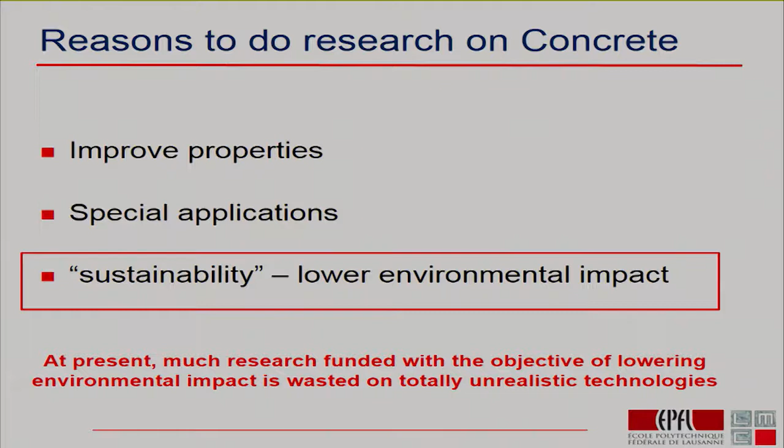Unfortunately, when we come to talk about sustainability, I think the general public and the funding agencies are not really all that well informed. We unfortunately see quite a lot of research funding with the objective of lowering environmental impact often wasted on totally unrealistic technologies, because concrete is the most used material in the world.

But before I talk more about that, I want to introduce this slide. Global warming and CO2 is a worldwide problem. CO2 doesn't stay where you produce it. Today we have to be realistic that this is overall CO2 - this is the amount we produced in OECD countries, this is the amount we produced in non-OECD countries. So even if we completely stop all our emissions in North America, Europe, this would go nowhere near solving the problem. We've really got to work on solutions that can be picked up in what we generally call developing countries.

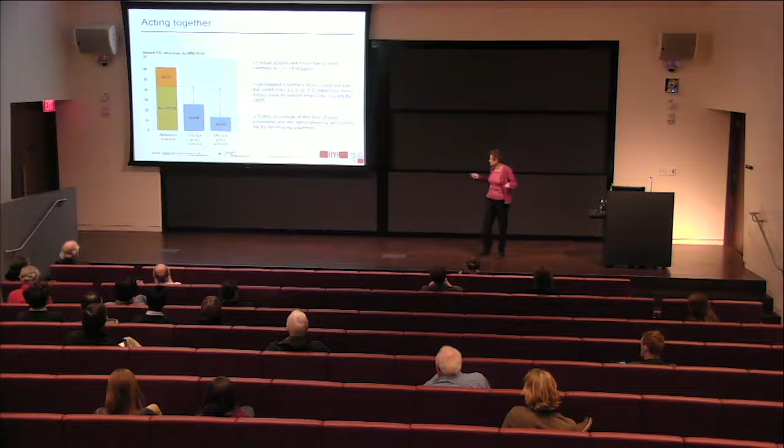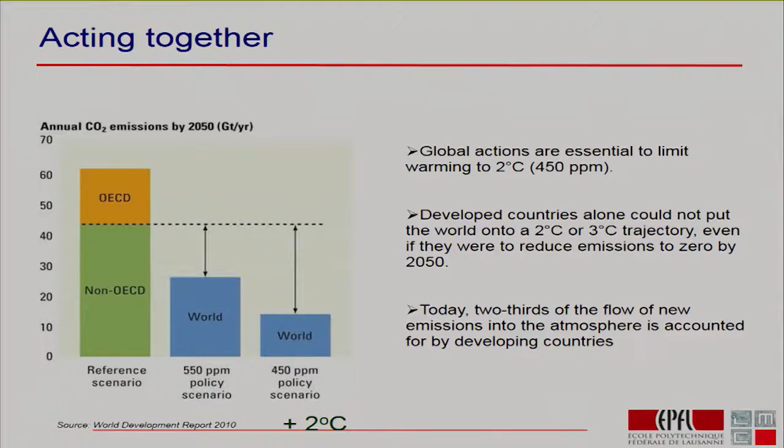These are overall CO2 emissions, but if we were to look at the breakdown when it comes to concrete, we would have even more of the emissions coming from non-OECD countries. So I think we've got to think about technologies not just that can be applied in developed countries like North America and Europe, but in the developing world.

Now the second thing I want to say is, people have very negative views about concrete. And this is really, I think, very much unfair, because we just don't appreciate that concrete is everywhere. Concrete makes up about half of everything human beings produce. We simply couldn't do without it. And here's the comparison for three very common materials: concrete, steel, and timber.

Concrete makes up about half of what we produce every year, and in doing so, it accounts for about 8% of CO2 emissions. Now, that's actually not a bad ratio. When you look at steel, there's about 20 times less steel produced than concrete, and it produces almost the same amount of CO2. So the amount of CO2 coming from concrete in terms of performance is extremely good. It's just because we use such a colossal amount of it that overall it produces a lot of CO2.

And we come to something like timber. Many people argue about these figures, and I don't really want to argue about the numbers in terms of CO2. I just want to point out that today we're using about 1/10 of the amount of timber compared to concrete, and we already think this is way beyond the limits of sustainability. That's to say, we're cutting down much more forest than we're replanting. So there's no way a material like timber can replace concrete. It's just physically not possible.

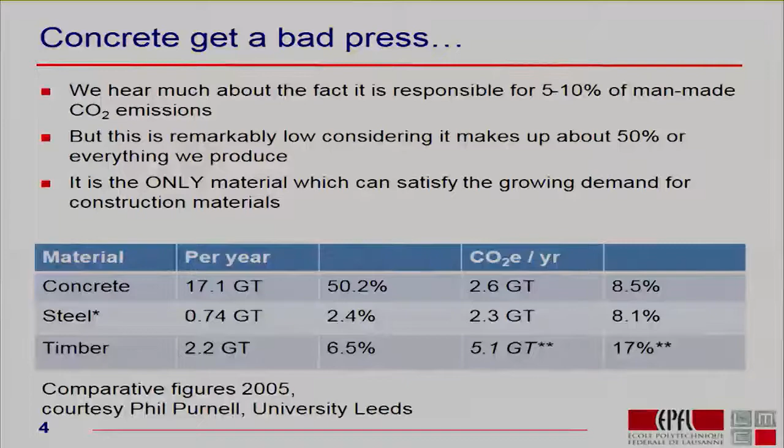When I make this presentation in North America and Europe, particularly countries like Sweden, they say, oh, this can't be true, we have very sustainable timber production. Yes, you do have very sustainable timber production in Sweden, but Sweden is a very small country of about 10 million people. If you go to very big parts of the world like China and India, you cannot build in timber—they do not have timber. The only choice you really have is concrete. At lunch today, one of the students asked me, do you think there's a future for concrete? I think if you look at these figures, you realize there's no alternative.

We're going to be using concrete for the foreseeable future. And if we're going to be using it, what we really need to think about is how we can make it better. This figure of 5 to 10% needs to be put in perspective.

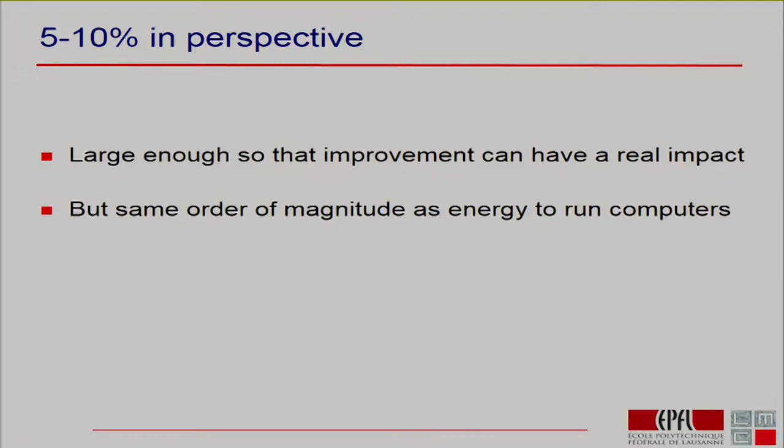I made this presentation to architects in Zurich, and one guy stood up and said, I think construction is causing so much CO2, we'll have to stop building in the future. I looked at this guy and said, are you serious? Are you telling me when you grow up, you're going to sleep on the street because we're not going to build any more houses for people?

Nobody thinks it's bad that this is the same order of magnitude as the energy we spend running computers. Every time you press Google search, you are sending CO2 into the atmosphere because the servers doing that searching need a lot of cooling. So let's get it in perspective. People have to live somewhere. We could say it would be better if the world population was perhaps lower—that's another debate, I don't have the capacity to do much about it—but if there are the people there, then they need houses, and concrete's probably the best way of doing it.

So let's look at where this CO2 is coming from, because we need to know where it's coming from if we're going to reduce it. Cement accounts for 95% or so of the CO2 emissions in concrete. 60% of the CO2 is coming from the production, and this is really quite unique in terms of industrial processes, because most industrial processes, nearly all the CO2 comes from the energy in that process.

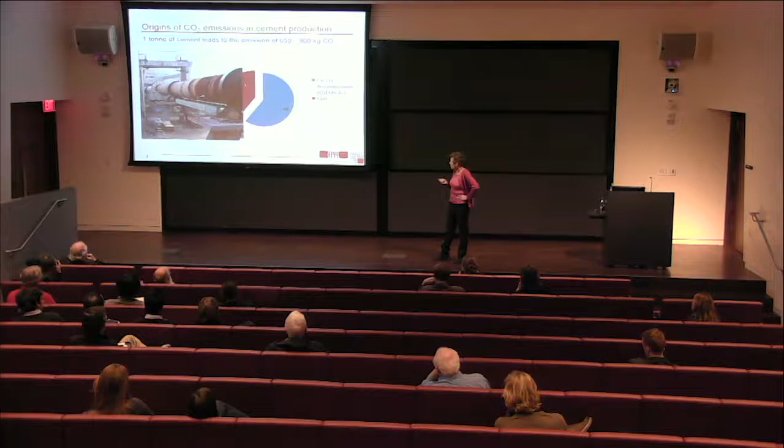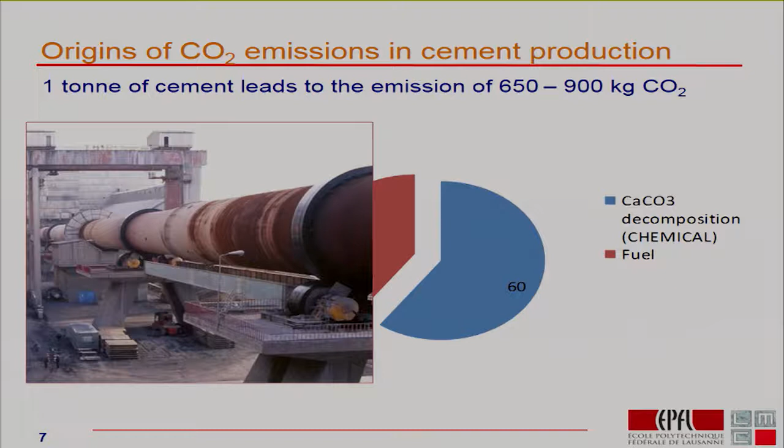So if we have alternative energy sources, like solar or wind, then this will largely solve the problem. In making cement, only about 40%—this is a cement kiln, you have a huge flame which heats the cement raw materials up to about 1450 degrees Celsius. It seems like a very energy-intensive process, but it's actually very efficient. The efficiency of a modern state-of-the-art cement kiln is around 80% of thermodynamic limits, and those of you who study thermodynamics know you really can't do that much better than that. More than that, it's a very flexible process, because nowadays you can have most of that fuel coming from waste. For example, when you're making the seats in this auditorium, you'll have lots of polymer offcuts. You can chop that up, feed it into a cement kiln, and use it as an energy source for cement.

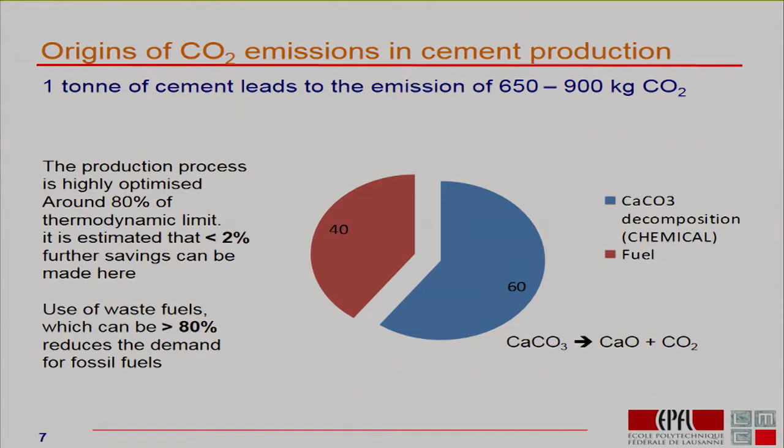So it's a very flexible tool, and it's unlikely we're going to be able to make a lot of savings here. So we really have to look at this other 60%, which comes from what we often call chemical CO2. The first stage in the production of cement is we take limestone, which is calcium carbonate, and the calcium carbonate decomposes to give us calcium oxide and CO2, and that accounts for 60% of the emissions. Now, if we're going to change that, the inevitable consequence is we're going to change the chemistry. And if we change the chemistry, then the whole way it reacts and performs is going to change, and that's why we need research to find out what differences these things make.

Now, the demand - we're not facing a static situation. We're facing a situation where the demand is going up, and it's going up fast. These are the projections out to 2050.

But if we look at what's already happened in China in the last 10 years or so: China has invested in its infrastructure. It's built housing, it's built high-speed rail links. This all has used concrete. Today, China is producing more cement than was produced in the whole world 10 years ago. I think Bill Gates came up with the figure that in the last 3 years, China has made more concrete than they did in the USA in the whole of the 20th century.

So it's colossal. And things are slowing down in China now, we read about that every day. But what's going to happen in India? Today in India, the consumption of concrete per capita is 6 times less than China. Even if India doesn't reach the level of China, even if it only goes to say half that amount, that's still an awful lot more cement that's going to be needed.

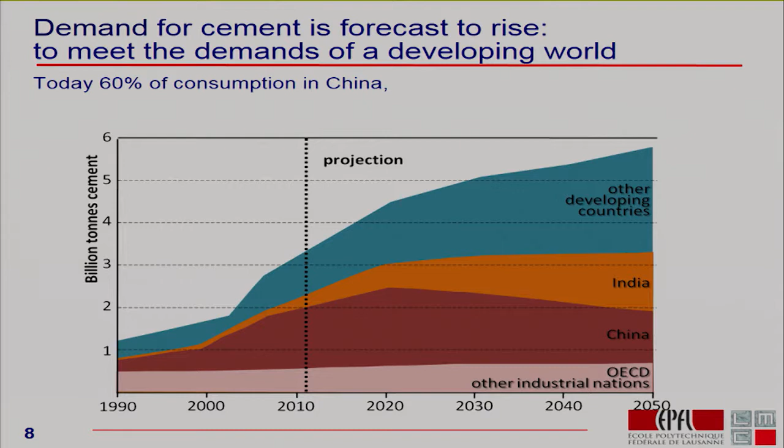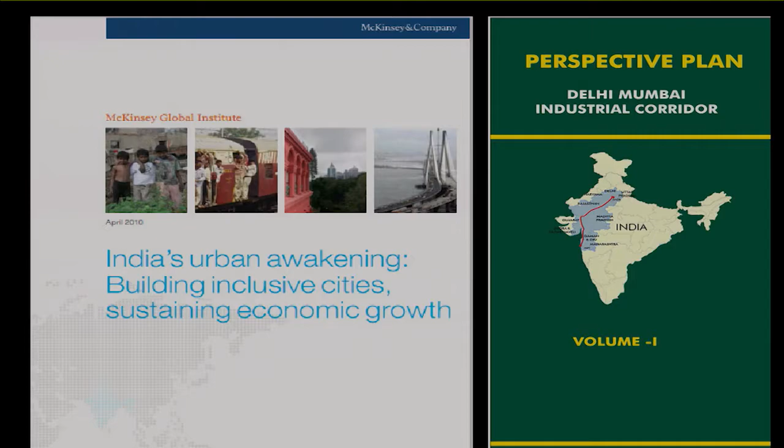And there's a lot of other countries in South America, Africa, the rest of Asia, that are really looking at the same development path. This is just an example from India - this is what they're aiming at now. This Delhi-Mumbai corridor, I think they've got plans to build about 80 new cities in this corridor.

So before we go on to look at what can be the solutions, I think we also need to look at why this product, Portland cement, is just so good. And it is so good - I hope I can convince you of that by the end of the lecture. It was invented nearly 200 years ago, so we think it's kind of old hat, but by a coincidence of geology and other things, it really does work amazingly well.

Now, this is the analysis of elements in the Earth's crust, so that's a pie chart. And it's something that comes from the cosmology of stars. But basically, you have these 8 elements: oxygen, silicon, aluminium, iron, calcium, sodium, potassium, magnesium. This makes up 98% of the Earth's crust.

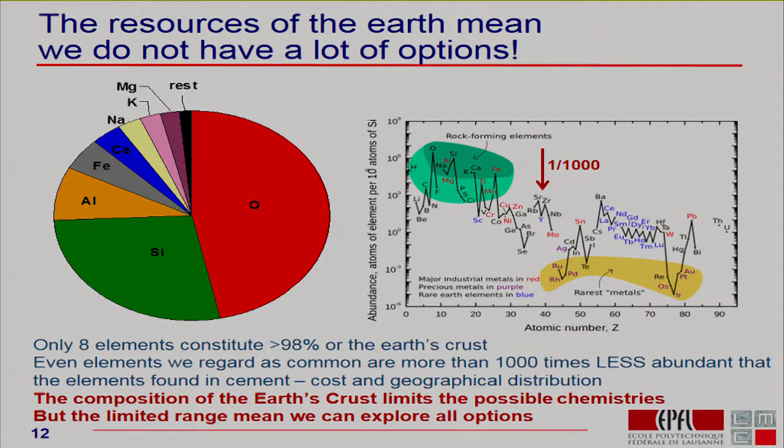And you can see in this other graph here the abundance, and you can very roughly say that abundance is equivalent to cost. So as we go down here to these rare metals, we see the things that really cost a lot, and here we see the things that are really cheap. So even something like barium probably costs 1,000 times more than something like calcium. You can make cements out of barium salts, but this is really not going anywhere in terms of solving our construction problems.

But the other interesting thing is that we can really do an exhaustive analysis of all possibilities. So people often come up to me and say, what's new? Like there's going to be some new miracle solution we can come up with. And what I try to tell them is, look, there isn't. We know we have looked at all materials we can imagine to make cement, because we understand the basic idea of how cement works.

You take this gray material, these gray grains, and you mix it up with water. At the beginning, it looks like this - you have these gray grains floating around in water. And you can move it, you can shape it, you can form it, you can put it in a mold. And then you have this reaction between this gray material and the water to form this new red stuff, which we call hydrates.

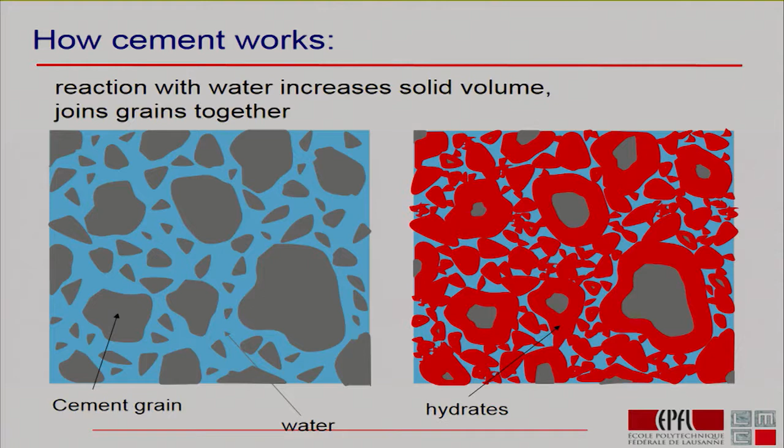And the magic thing about these hydrates is that they have combined the water into solid form, so that now this solid, which is red, occupies more volume than the grey stuff. And because it occupies more volume, it starts to fill in all these spaces between the grains and link them together. And that's how you get the strength. That's basically how concrete works.

So if you're going to have something that works as a cement to make concrete, it needs to react with water. The ions need to move through the water, and they need to deposit in the space. So let's look at these different oxides in the Earth's crust.

If we take the two alkali oxides, sodium oxide and potassium oxide, these are both very soluble. You can have very high solubilities of sodium, potassium in water. So these may be present, and they're not necessarily doing any harm, but alone they're not going to give you this hydrating system.

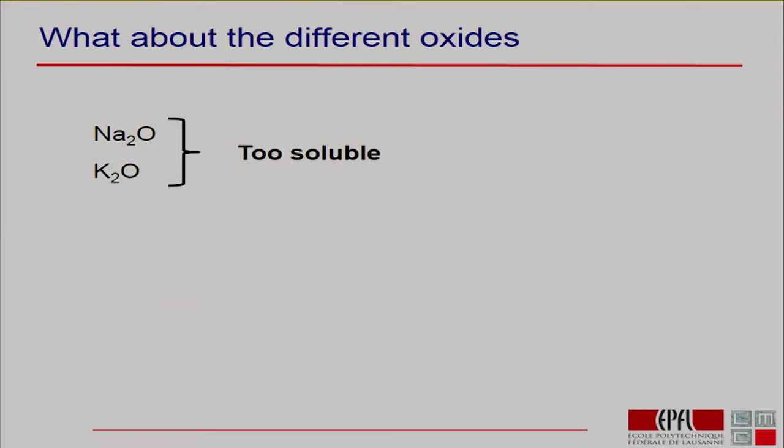If we look at iron and magnesium, on the other hand, we have the problem that these have very low mobility in alkaline solutions. For example, here we see a micrograph taken from a piece of concrete that was in a building for 30 years, and you see these bright white areas.

Now, these bright white areas are where the iron is, and the reason they're so well defined is because they're in exactly the same place they were 30 years ago. They were in the cement grains when it went into that concrete, while the other elements, calcium and aluminium, have moved around and filled in the space. So we now have products between these grains, but the iron has just stayed in exactly the same place. So again, it's not doing any harm, but it's not really doing any good in terms of giving us strength in the system.

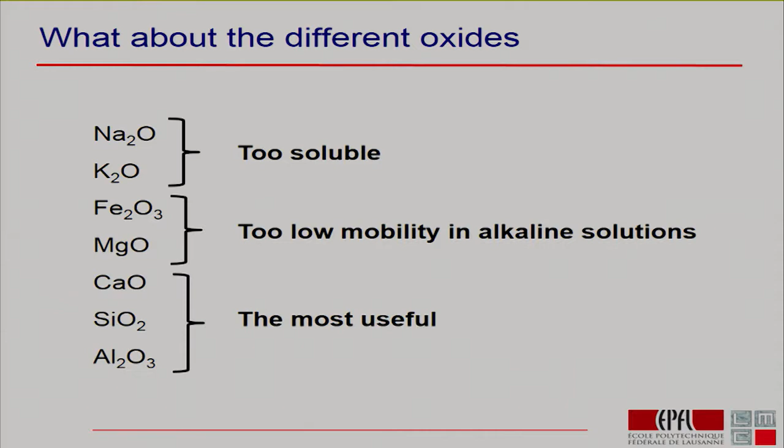So it doesn't go into the space here. It doesn't bridge the spaces between the grains. It doesn't contribute to the strength development. So this means we've gone from the composition of the Earth's crust down to this system of just three oxides: calcium, silicon, and alumina. So it's really quite simple. This is the system of oxides we can use to produce cements.

If we look at this system, calcium, alumina, silica, we see we've got the composition of Portland cements here, which are basically calcium silicates. The only other hydraulically reactive minerals we have in this system are down here, basically calcium aluminate cements, and by extension, with a bit of sulfate in the system, calcium sulfoaluminate cements. So in this whole system of all the Earth's materials, these are the hydraulic minerals that are interesting. Of course, you can have barium silicates and things like that, but that's not really serious.

So the problem here is that to produce these calcium aluminates and calcium sulfoaluminates, you need considerably more alumina compared to silicon. Geologically, this is rather rare. Generally, alumina and silica occur together in nature in roughly the same proportions. If you want sources with much more alumina, you have to go to materials like bauxite. Bauxites are much more localized, and they are under increasing demand for aluminium production, so they're more expensive. So if you make cements here, they're going to be a lot more expensive.

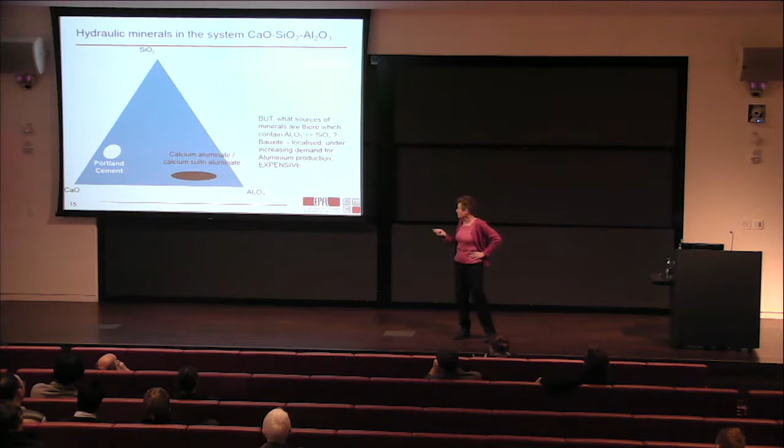Calcium aluminate cements, for example, cost today about 5 to 6 times the price of Portland cement. Now, that price differential I'm going to come back to, because it doesn't all come from the geology and the expense, it also comes from the difference in scale. But it starts with the expense.

Now, the second advantage of Portland cement: we happen to have a cement formed from the most abundant materials in the world, and it has this incredibly useful pattern of reaction. Why is this so useful? This is the heat evolution, which is a signature for the reaction. What we see is a very high heat evolution to start with, then it dies away, and stays quite low for a period of 2 to 3 hours.

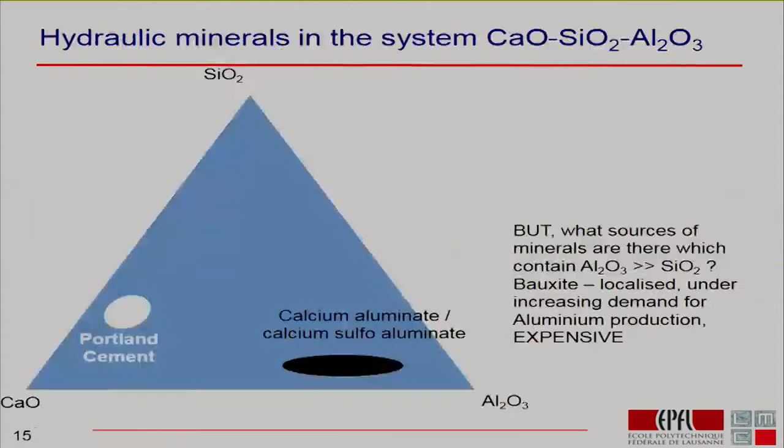Now, this is very useful because it means you can mix the concrete, transport it, and you've got this period of a few hours where you can put it in place. Not many materials do that. The calcium aluminate or calcium sulfoaluminate systems we looked at generally set much faster. And this is also robust, meaning it can be used by almost anybody, almost anywhere.

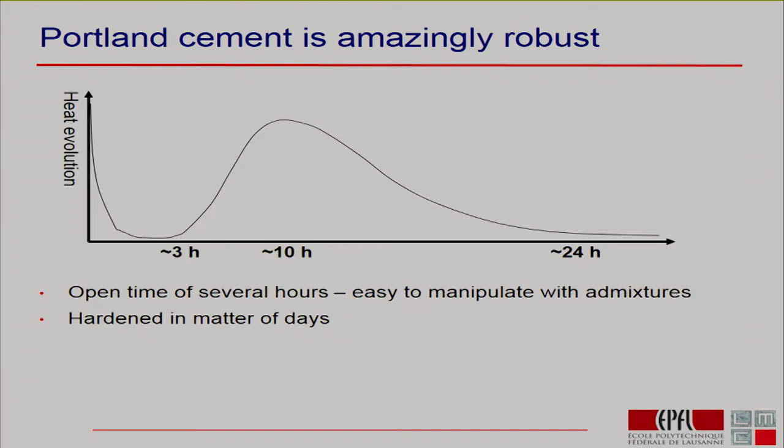And we have to face that. We have to realize that this is where a lot of cement produced around the world is consumed. And if we're going to do anything about sustainability, we have to have materials that can be used in a similar way.

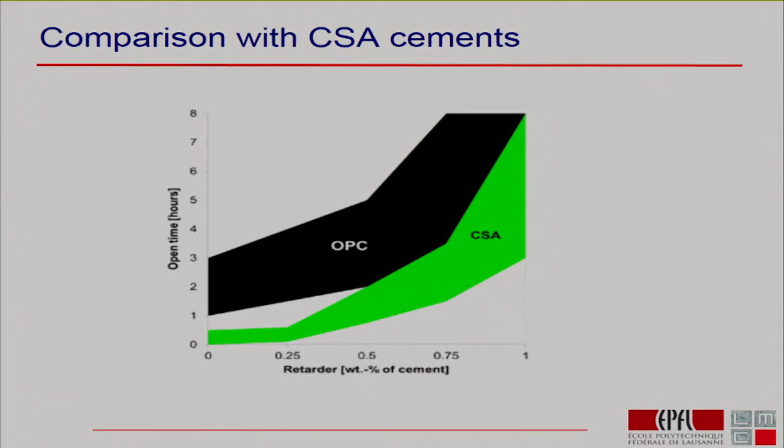Here's a slide where we compare Portland cement's open time - the time you can work with it - for OPC and for calcium sulfoaluminate cements. You see calcium sulfoaluminate cements set very quickly. You can retard it with chemical retarders, which adds to the expense and complexity, but then you've got a large area of variation.

So where do we come to after all this analysis? We've seen the composition of the earth. We've got these calcium silicates, which work very well and give us our robustness. Well, what we can do then is mix this Portland cement with other materials.

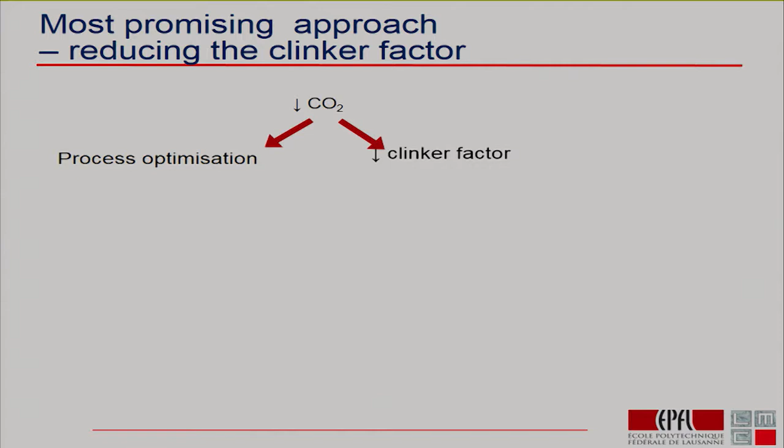This is what's called reducing the clinker factor, because in most of Europe this is already done at the cement plant. In North America, they try to do it more at the concrete stage, which adds another level of complication, but we don't need to talk about that today.

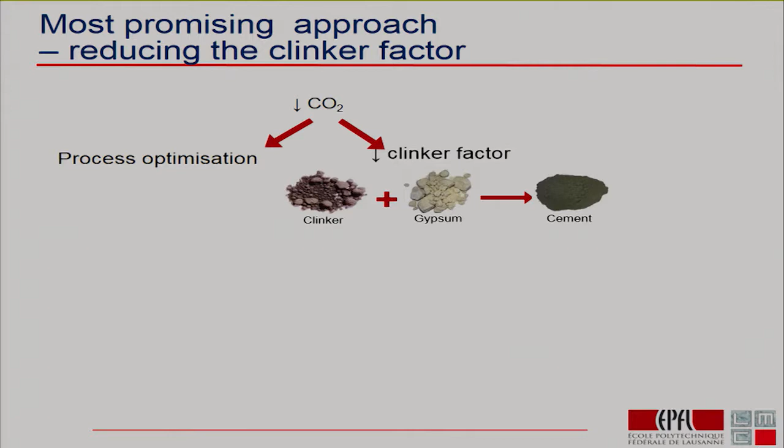So what does reducing the clinker factor mean? It means that basically in the past, 50 years ago or so, we had clinker - the stuff that comes out of a cement kiln - and we ground it with a bit of gypsum, calcium sulfate, and that gave us cement. Nowadays, we introduce increasing amounts of what we call supplementary cementitious materials.

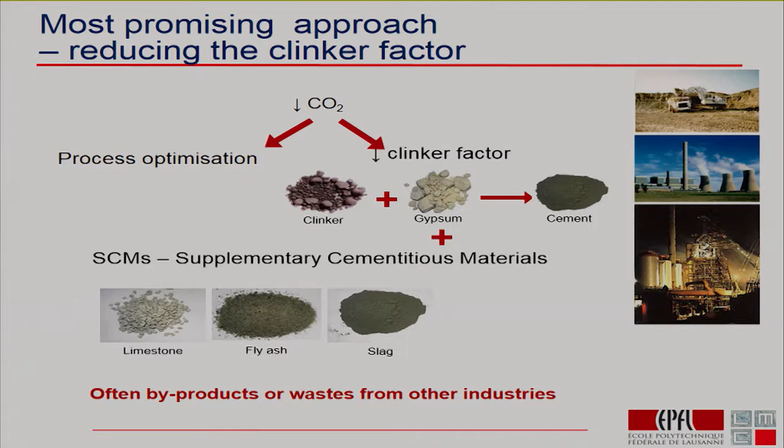These are things like fine limestone, fly ash that comes from burning coal to produce electricity, slag which comes from blast furnaces where we reduce iron oxide to make steel, and also natural pozzolans. So we have this family of materials which we can now interblend with the cement to reduce the amount of Portland cement clinker.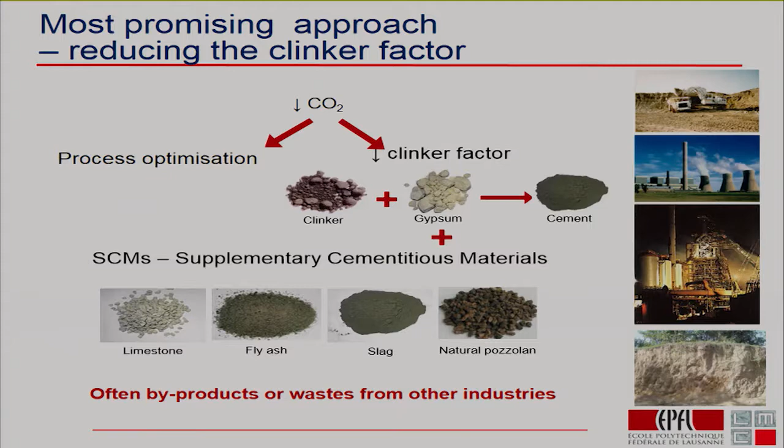These things either have no CO2 associated, like limestone, because it's not heated up and keeps hold of its CO2. Fly ash is a waste product, slag is a waste product, etc. These are basically CO2 neutral and therefore reduce the overall CO2.

And incidentally, we can see that these all have quite similar chemistries. We can see here that they all tend to have the same ratio of silica to alumina, because that's what we find mainly in the Earth's crust, coming from feldspars and then clays.

If we take the figures for Holcim, one of the biggest international cement companies - these are the worldwide figures for their factories - you can see over the past few decades the average amount of clinker they have in their cement has been reduced by more than 10%, and this reduction of more than 10% is equivalent to a more than 10% reduction per ton in CO2.

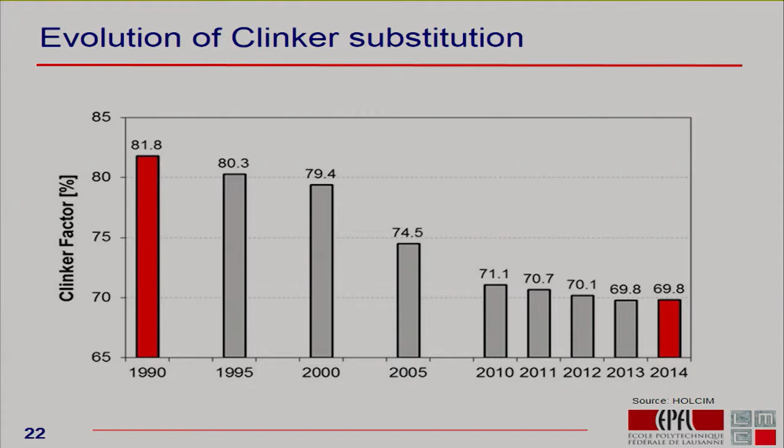So that's great, but what we actually see is that this strategy for replacing cement with other things is kind of leveling off. You can see that here from the figures from Holcim. There's been very little progress in the past 5 or 6 years, and these are the worldwide figures from a lot of cement companies.

And we see that at the end of the day, we're really talking about 3 products: limestone, slag, and fly ash. This makes up more than 80% of the materials we blend into concrete.

So why is it slowing down? I'll come back to that. It's slowing down because the amounts of these materials we have are in fairly short supply compared to the colossal amount of cement we need.

So we take slag. I mean, slag is a great thing. You can mix it at 70% or even 90% substitution of clinker. But the amount we have worldwide is about 5% of the amount of cement we need. And 99% of that is already being used in concrete. So all the benefit of CO2 reduction from slag, we already have. We can't go any further with that because there's no more slag available.

And this situation is probably going to get worse because, as you saw at the beginning, making steel produces a lot of CO2. There's big pressure on steel makers to reduce CO2, and one way they do that is by recycling. So there's going to be less and less slag available in proportion to the amount of cement.

And fly ash - okay, there's more fly ash available, but the quality is very variable. So today we can only use about 1/3 of the fly ash produced in concrete. Perhaps we can go further with that, but generally there's a lot of it which has really very low performance, doesn't really react any more than putting in sand or something like that.

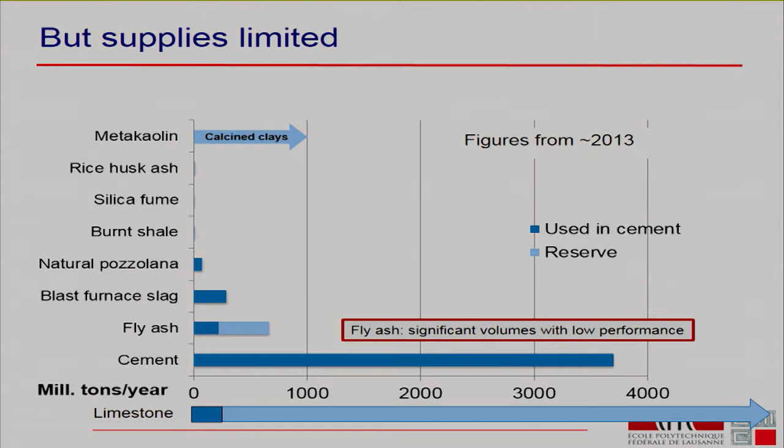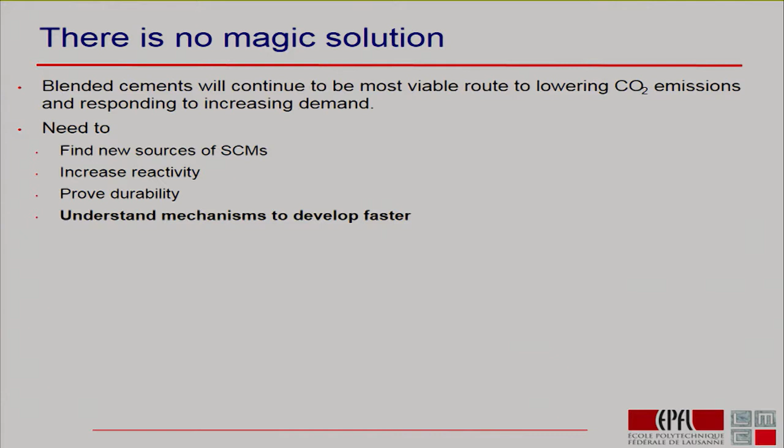So just to summarize that, I think really we can see that blended cements will continue to be the most viable route to lowering CO2 emissions and responding to the increasing demand. And what we need to do, we need to find these new sources of SCMs. We need to increase their reactivity. We need to prove the durability. And we need to understand it from a mechanistic point of view because most of the approach so far has been kind of mix it up and see what happens. And this takes much too long. The development route is much too long.

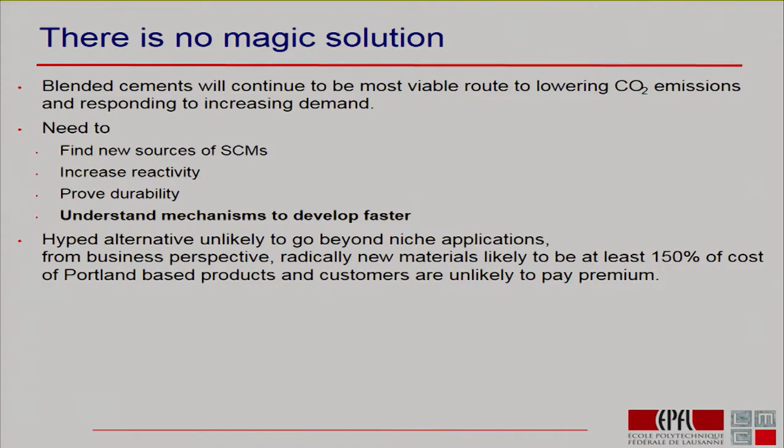And we see many, many hyped alternatives. All around there are these different things. There's a company out in California that works on recarbonating calcium. Well, that's fine. You can recarbonate calcium, but where do you get the calcium from in the first place? There aren't many sources of calcium in the world that don't already have the CO2 attached. And the problem is these radically new materials, Portland cement is very effective because of the economies of scale.

I told you about calcium aluminate cements, and I said these cost 6 times as much as Portland cement. The reason they cost 6 times as much is not just because they're made from bauxite. It's because there's so much smaller volumes, so the number of people you have to make the product, to sell the product, to provide technical assistance increases in proportion. So, that's what I've already said here.

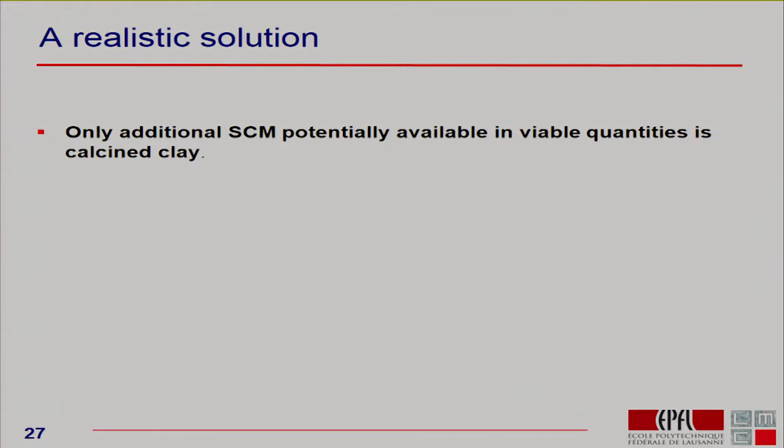Right, so what's a realistic solution? The only SCM, as I see it, potentially available in the quantities we need is calcined clay. And this is what we've started working on. It was a project that gradually built up and now really has been going full scale for about 2 years. And interestingly, our funding is not coming from the National Science Foundation. It's coming from the Swiss government agency responsible for development and cooperation. So this is like an overseas aid budget.

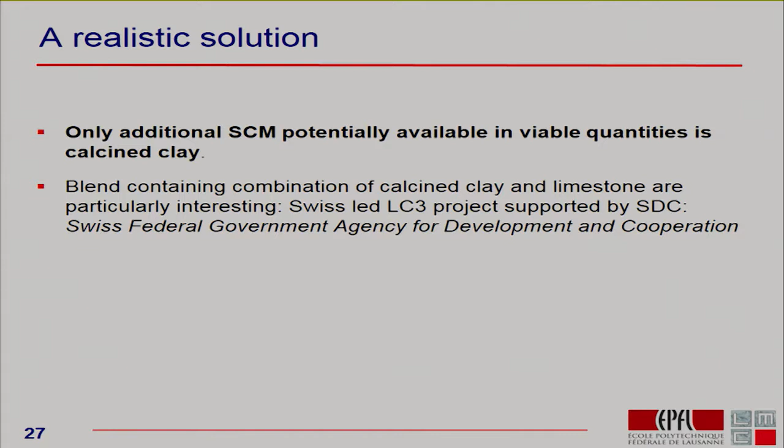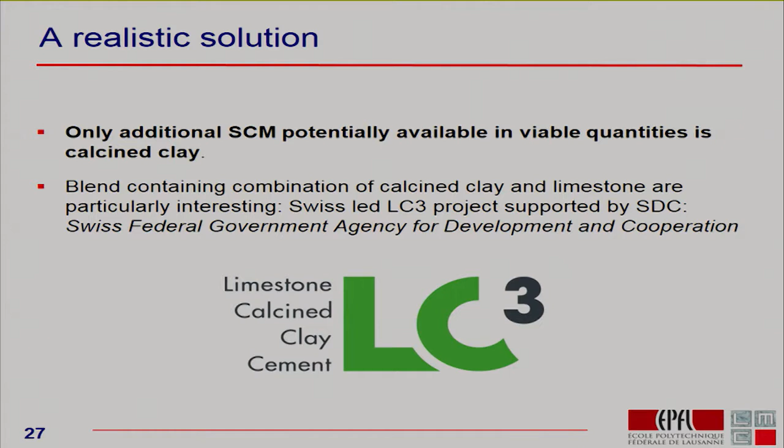It's quite a challenge working with these people because they're not scientists, and they don't understand it. But it also puts a big pressure on us because we actually have to try and get people to make this stuff, not just stay in our laboratories and do nice things. So we've called this material LC3. We started out calling it low carbon cement, and then we realized everybody called their solution low carbon cement, and we said, let's not make a value judgment, let's just say what's in the tin. It contains limestone, calcined clay, and it's a cement. So we called it LC3.

Now, where this gets interesting is if you look at where we have clays. And clays are one of the most abundant minerals on Earth. And the clays we really want are the clays which contain kaolin. And these clays we generally find in this region of the world. So certainly where we have yellow regions, certainly where we have this kind of lime green color, but also in India, we've found very, very abundant deposits in this region of Rajasthan, which is not showing, but generally in all this region. And what's really exciting is that these regions coincide with exactly the countries where they want more cement. So we have a really good coincidence between the availability of the material and where they want to use it, and often it's sitting around like this.

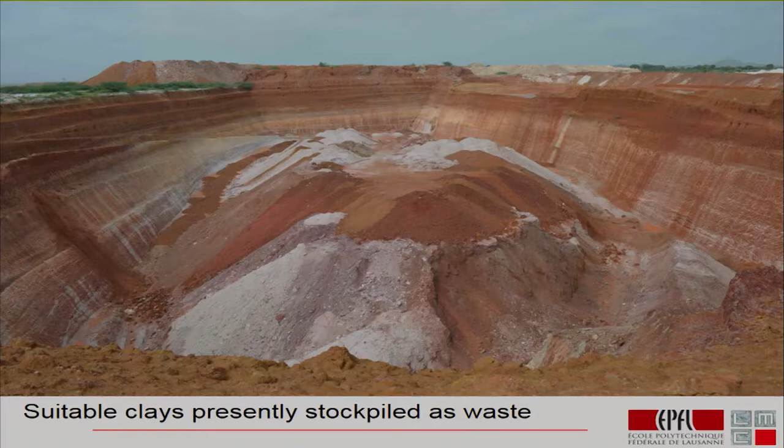This is a picture from India. This is a quarry where they're extracting clay to make plates, but a lot of the stuff in that quarry is not sufficiently high grade to make pottery, so they just leave it in these heaps. And we've taken material from these heaps and we've produced this material. I'll show you the results in a minute. So often you don't even need to open up new quarries. You can just go and collect it and take it away.

And where we had the kind of breakthrough was putting this together with the idea of limestone, because it was shown that limestone actually reacts with alumina. So you've got a little bit of alumina in your clinker, but you've got a lot more in your calcined clay. If you put this together, you can go to now 50% substitution.

Sorry, this is in cement chemist notation, where A is alumina oxide, S is silica, etc. We have alumina and silica coming from the clay. We know they can react with calcium hydroxide, which is produced by the clinker, to produce CSH and other alumina phases. We know that limestone can react with alumina.

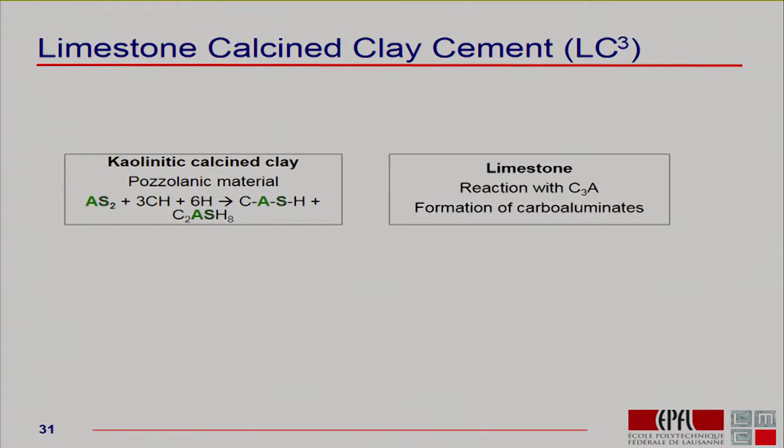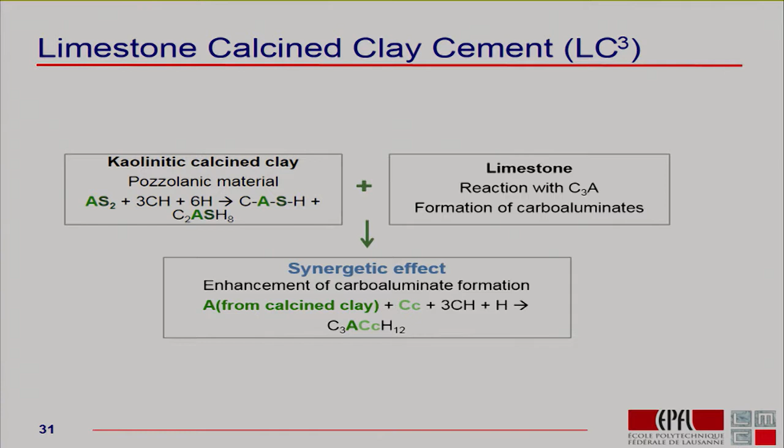Well, we put the two together, and we can get a lot of this phase, which we call calcium monocarboaluminate. And this is a hydrate like any other hydrate. It fills space. It bridges the gaps between those grains. Now, it does depend somewhat on the quality of your clay. So you can see here we've got different clays containing different amounts of kaolin. And generally, the more kaolin they contain, the better they will perform.

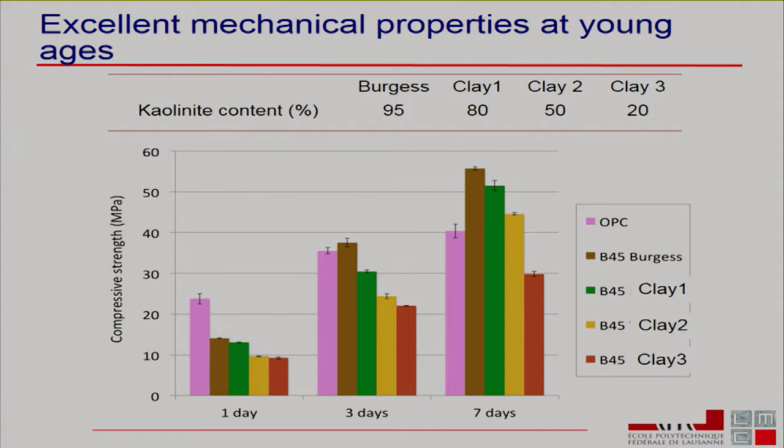But if we look at a lot of clays, and we've now tested about 20 clays in this benchmark system, we can see that we just get a very strong correlation with just one parameter. And this is very interesting, because when we first started out, people said to us, oh, there's all different clay mineralogies around the world. How are you going to work out what works and what doesn't work? Well, what we can show is that it really only depends, in the first approximation, on just one parameter.

And this parameter of kaolinite content you can measure extremely easily just by looking at the weight loss step around 500 degrees. And these little dotted lines show the reference strength of the pure Portland cement. So you can see that even for kaolin contents as low as 40%, you can match that reference strength of your Portland cement even as young as 7 days.

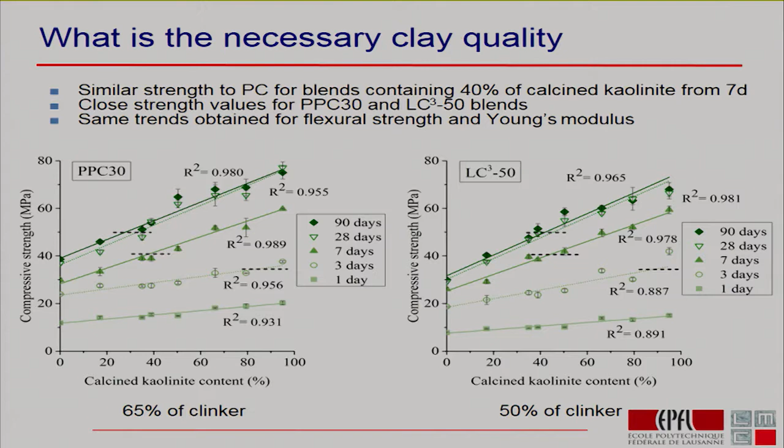So, you know, we know how to assess the clay quality. We know what are the important parameters. So that's great. We know the chemistry. We've analyzed the phases. We have all sorts of nice micrographs on that. But the point is, is it just a nice idea in the lab?

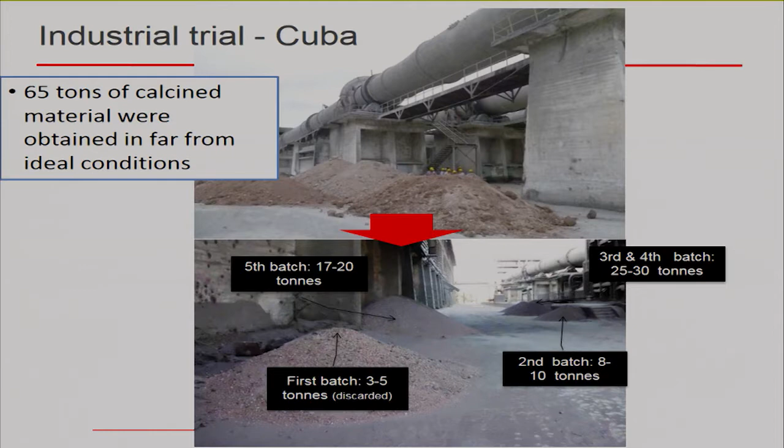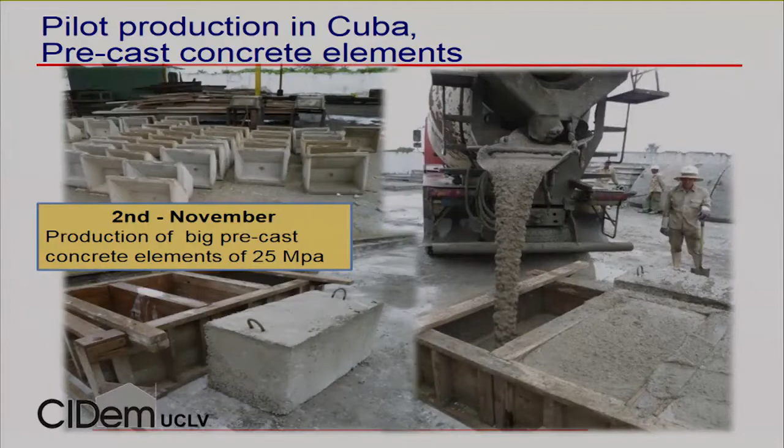They started making this stuff, and the kiln started melting. They had to shut it down. I mean, you know, nightmare. I said, this is never going to work. But Fernando, who's an optimist, said, we'll do it. And the point is, it worked. We can make concrete. Sorry, here's Fernando back here, standing in the concrete yard.

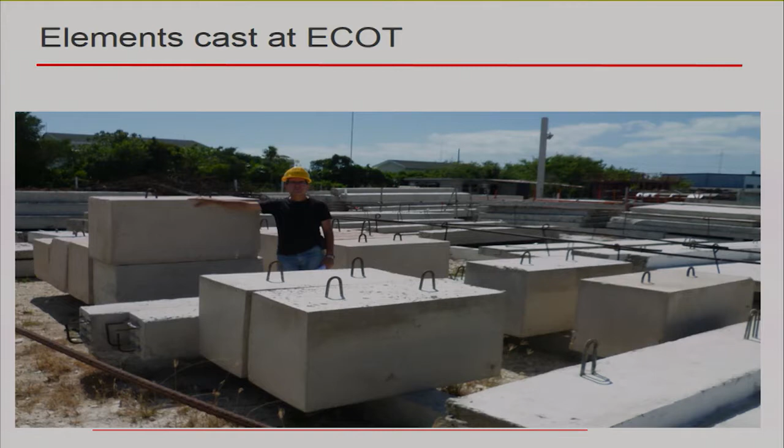I mean, you just do not realize what a miracle this is, because you produce it almost any old how. You take it to totally unskilled workers in a precast plant. You say, use this new material, and it works. I mean, my God, that's amazing. Absolutely amazing. I really promise you this is amazing.

What should we do next? And they said, well, you know, Cuba, it's this very small country. Their CO2 emissions per person are almost about the lowest in the world. So what? You can produce this cement in Cuba. It won't make any difference in terms of CO2. If you want to make a difference, you've got to go to India.

Right. So we went to India. Luckily, we had the connections. We had our former PhD students who were the people, again, the heroes who put everything together. This shows the first production we made. And it's, again, a real horror story.

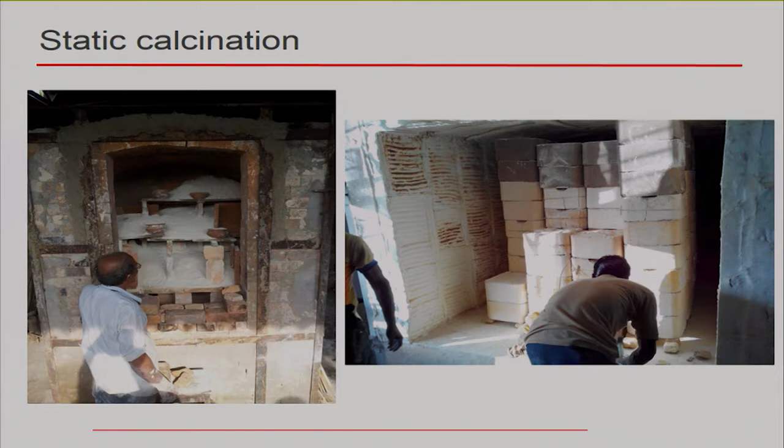Okay, it's not quite a horror story as this, but these pallets here, it's not a very good way to do it. The calcination is not complete. It was about 50% complete in this case. But we took it to people making roof tiles. This is totally unskilled workers, illiterate workers, making these roof tiles.

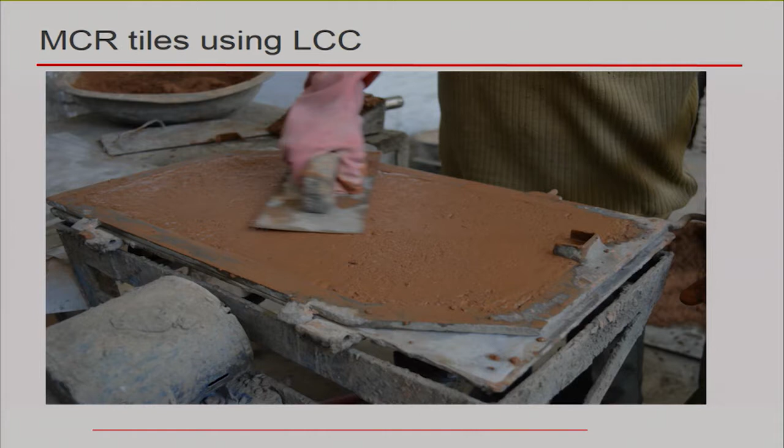Give them the stuff in the bag, exactly the same as the material they're using. They can make these roof tiles. They can demold them in exactly the same way they're doing them. And here's the strength results. You see, this is the material they were using, which is the fly ash blend. And these were all the materials we made in our trial production. You see they're a little bit stronger, but the point is they're the same.

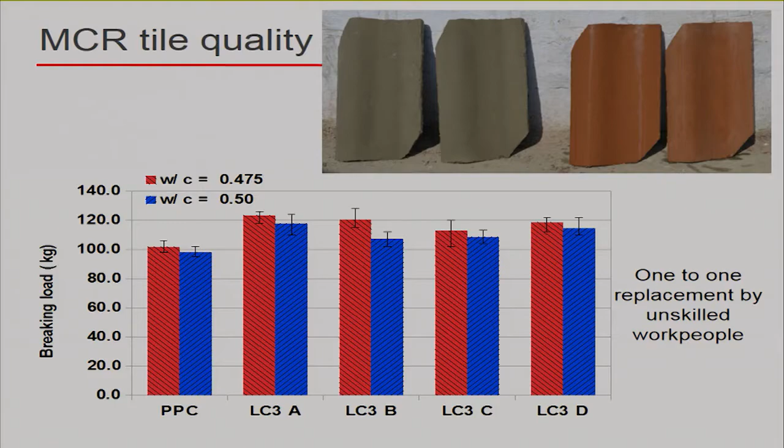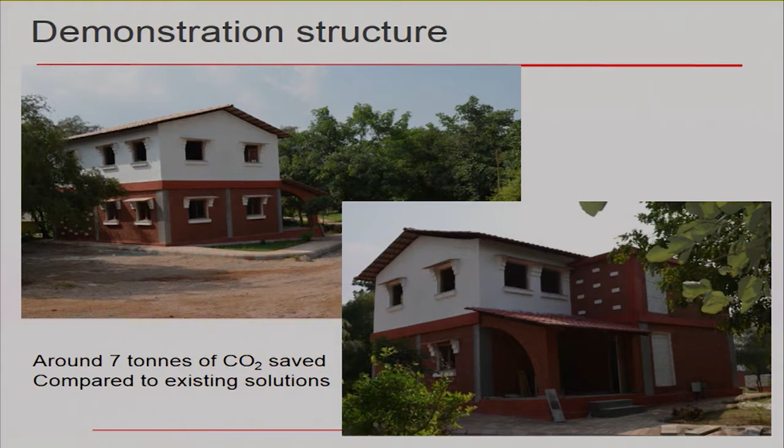And they made all these components, and they built a house. So we now have a nice house as a demonstration. And interestingly, we made the calculation, in building this house, we could save 7 tons of CO2 compared to existing solutions. This is even compared to using fly ash blends, okay? So this is over and above what you had before. So that's basically the story.

That's where I think a lot of our efforts are going in the future years, but there's an awful lot to do. And I think there's so much, I mean, always people want proof. We need to look at durability. We need to look at shrinkage, creep, and cracking.

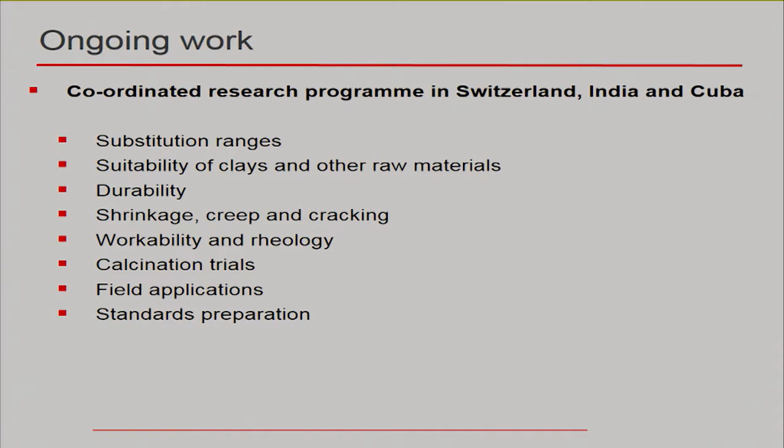All our results are positive so far, but we are working in a world where cements need to be standardized. People don't like change. It needs scientific work behind it, but I think it can be done, and hopefully other people will see the interest of these materials and start doing some research themselves, which can build the critical mass.

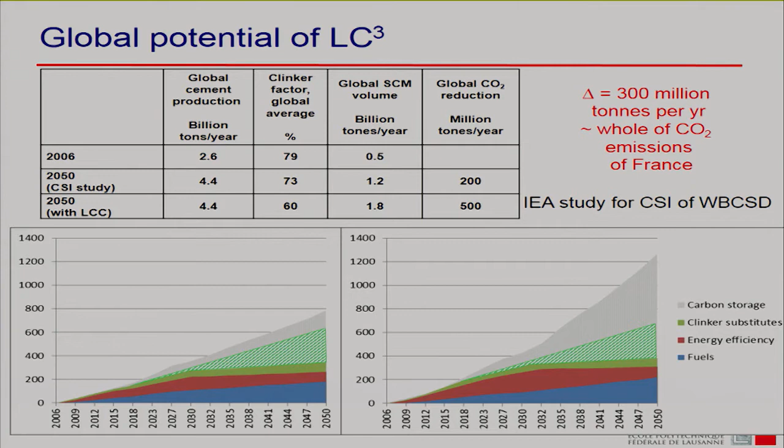You can almost entirely do away with any need for carbon capture and storage, and you can do that cheaper, at a lower cost. So it's a self-driving phenomenon. Once people get used to this idea, they'll do it because they can save money. You can save potentially about 300 million tons of CO2 a year, which is like wiping out the whole CO2 emissions of a country like France. So that's not bad. Some people say this is nothing, but I think if you have one single technology that can save about 1% of world CO2, that's not too bad. We should go for that.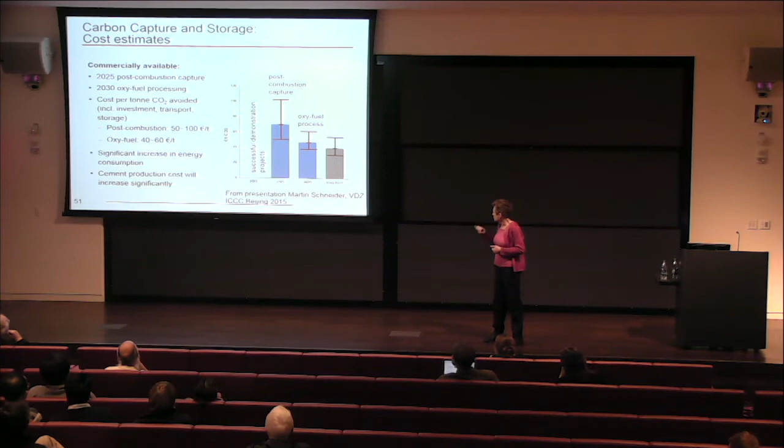That's just a slide to show you the cost of carbon capture and storage.

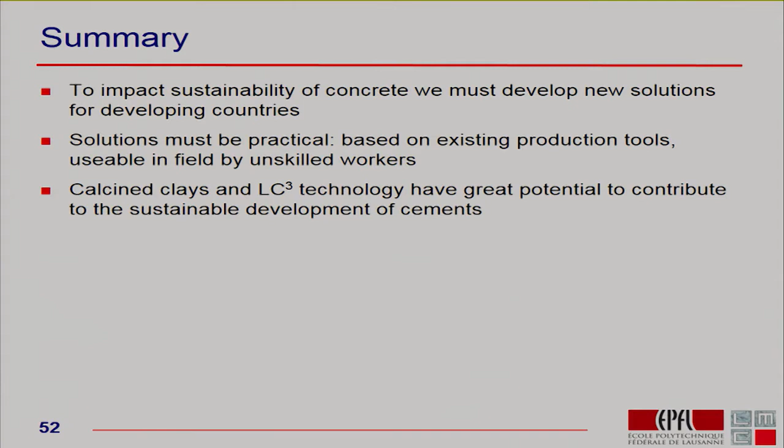I'm nearly finished, sorry, I've probably been going on too long. But the point I want to make is that if we want to impact the sustainability of concrete, we must have new solutions that can also be used in developing countries. It's no good having something that can just be used in a sophisticated precast plant in Europe or North America - that's not going to have a very significant impact. The solutions must be practical, usable in the field by unskilled workers. I think calcined clays, and this LC3 technology, have great potential to contribute in this regard.

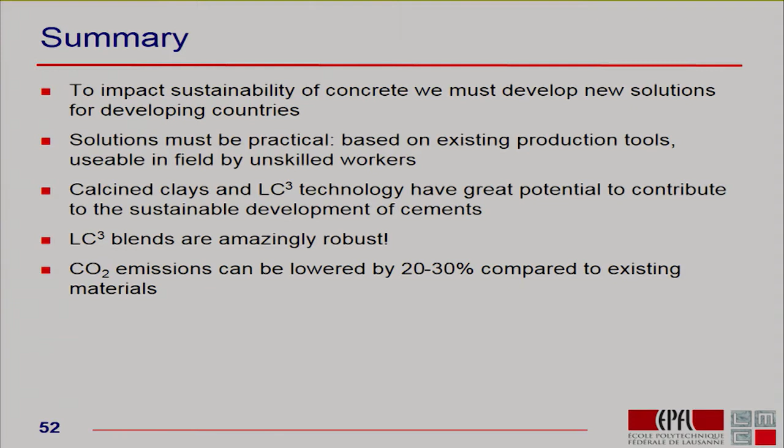What's really amazing is that they are so robust. This is partly because you've still got the Portland clinker there, which means the pattern of reaction with time to place the materials in the mold is still there. We've done detailed environmental assessments, and you can typically lower CO2 emissions by 30% compared to pure Portland cement, but even by 10 or 20% compared to existing pozzolanic cements.

This is important for countries like India. In India, they only have enough proven limestone reserves in places where quarries can be opened to supply cement plants for maybe the next 20 years - that's not very long. So if we can extend the limestone reserves, and we can do that because we can produce about twice as much cement from the same quantity of limestone, we also get reduced costs and reduced capital investment for increased capacity.

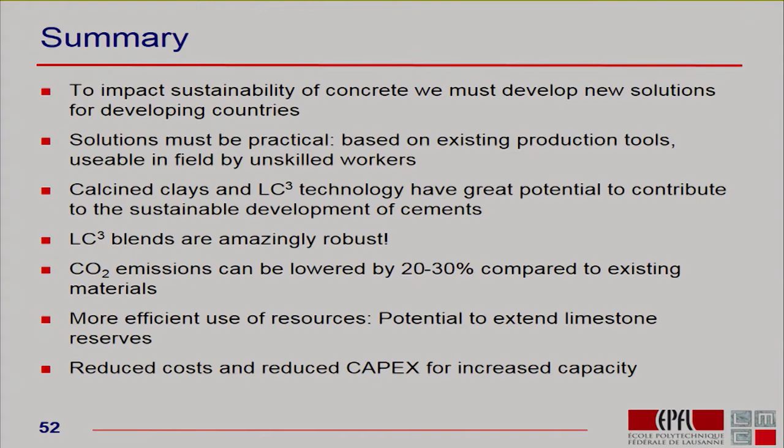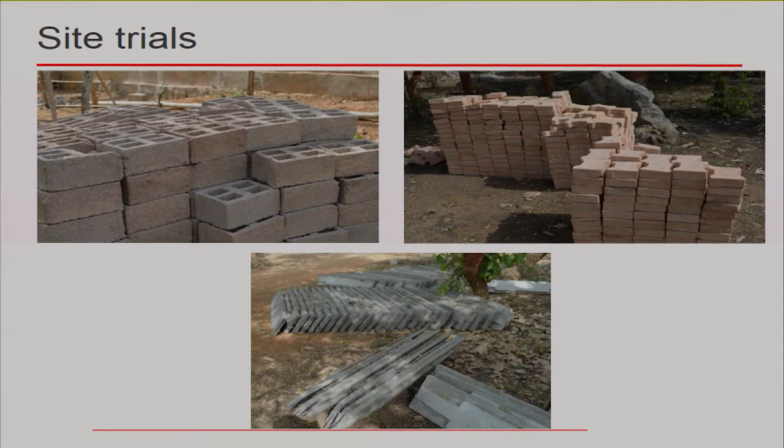Okay, so all that matters is mechanical strength? For those, because a building like that is not really under very aggressive conditions - there's no seawater there. Carbonation can occur, but we've got no steel in there, so we're not worried about that.

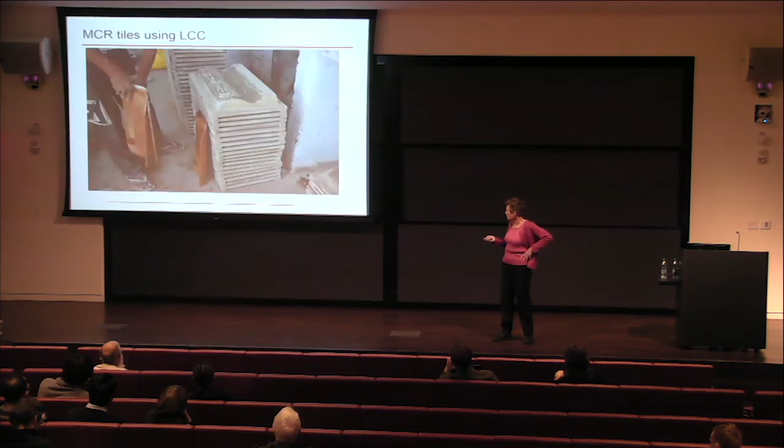What about acid rain? Acid rain's not that bad now. Generally most power stations have started to clean up. Maybe in China you've got a bit of an issue. But I've done work on acid rain on roof tiles - we did a lot of work in the past on roof tiles like this. It's not that bad. You can have these under very acidic rain conditions for 40, 50 years - they won't fall apart. They may look a bit discolored on the surface, but they won't fall apart.

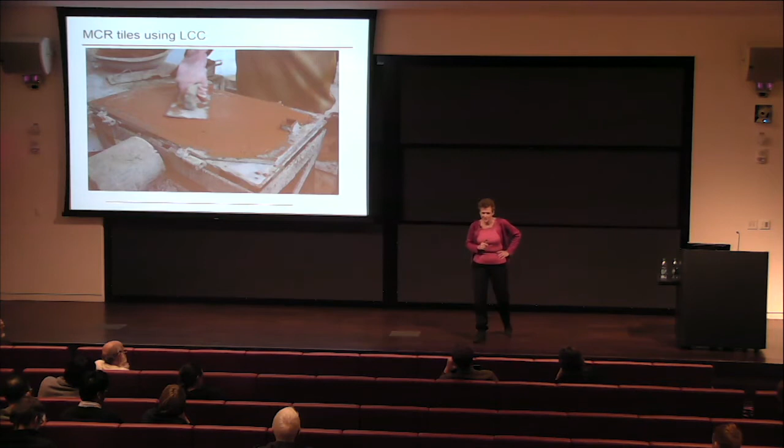So this is the first entry step. Then, of course, when you're looking at reinforced concrete, concrete like this, it's got reinforcing steel in it, so you have to be a lot more careful. This is why you do durability studies like testing in seawater.

Our first results are extremely good. They actually show this is probably going to be a real driver, certainly in Cuba, because they're really developing the tourist infrastructure, a lot of it at the edge of the sea. At the minute, they've got terrible durability problems, and our results from this site are looking extremely encouraging. But I didn't have time to put all that in, because then I'd have been speaking for 2 hours rather than 1, and I think most people would have fallen asleep by then. But it looks very, very good.

Yeah, one more point though, I think it's very important. The important thing about this is, at the end of the day, the phases we've got, the chemistry, is all chemistry of things we know. So we've got known chemistry, and we need to know about the pore structure - but we study the pore structure and we know how that varies. So we're not shooting in the dark with a new material. Sorry, you had a question down here?

No problem, thank you for your talk. Did you look at vapor permeability with respect to subterranean applications? We didn't look at that specifically, but I expect that to be another kind of advantage. We see that these have generally got lower permeability, so they'll be more watertight. But as a first approximation, the vapor transport is going to be pretty much the same, because you've got the same mineralogy and a similar pore structure.

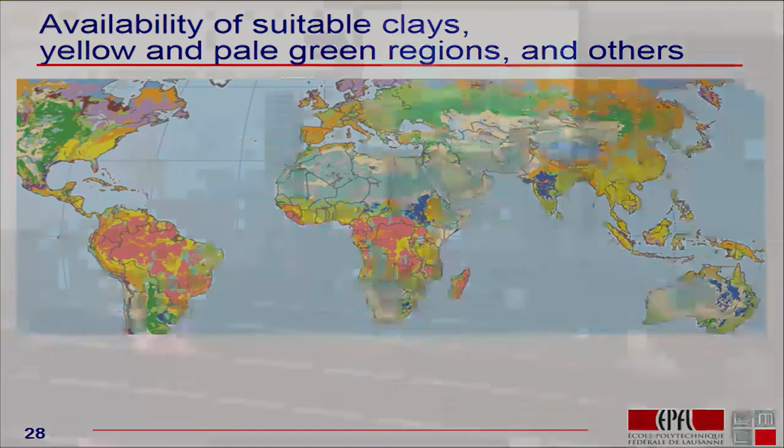I think it varies locally. In India, we've got huge amounts of stuff like this, and they've actually got more clay deposits than limestone deposits. In India, the big problem is limestone. You start using waste materials, that's fine, like the one I showed, but slowly people start digging and actually using the precious materials.

But we use clay to produce cement at any rate. At the end of the day, if you're going to have a building, it's got to come out of the ground. What's the most efficient way to do it? I made some calculations. If you use compressed earth, it's not a very strong material. You actually have to use about three times as much as if you produce concrete. So concrete is actually a very efficient way of producing a house.

Now, you're right, eventually we're going to take stuff out of the earth, but it's a question of choices. If you do it with steel, you're taking more material out. If you do it with timber, we simply don't have enough. So the only solution you've got is to say we've got to reduce the world population. Now, I maybe would agree with you there, but I don't feel that's something I can solve with my science.

But the issue is with limestone, we have hundreds of meters thick of limestone deposits, whereas we have only a few meters thick kaolinite deposits. So that's a big difference there. As I say, our first prospects have shown that in India specifically, where we've done the studies, we have a lot more clay reserves than limestone reserves. So you may be right, but in the particular problem they're facing in India, it's going to be easier to do this since they just don't have limestone quarries.

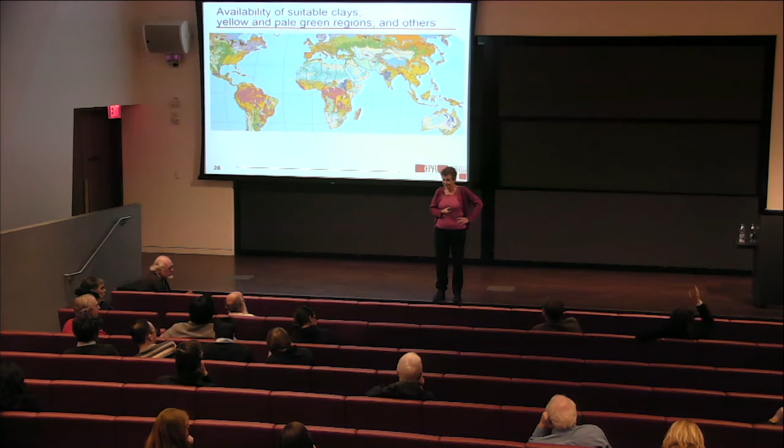This may be a totally ignorant question, but since we're talking about whether we have enough of a resource, is it possible to think about recycling concrete, in a way that doesn't cost a tremendous amount of energy to do it? Oh, that's a very good question. I had a slide about comparative energy and CO2 right at the beginning. This is a huge issue. The problem is you can recycle concrete, but in recycling it, you actually produce even more CO2. So the challenge is how to do it without doing that.

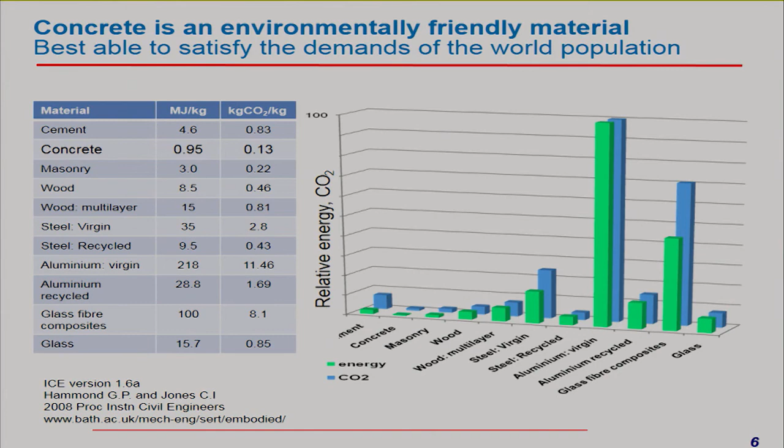Because you have to transport it and crush it, this all produces extra CO2. Now, of course, you may have good reason to do this because of lack of resources, and this is a debate that's going on, particularly in terms of aggregates. Many parts of the world are already doing that, so the technology exists. In fact, cement is not the problem, the aggregates are the problem, because cement is about one-tenth of concrete. That's also why it's quite efficient, because you dig the materials out to make the cement, but the final product, concrete, is mostly just rocks, and you can use any old rocks of any composition.

But even in many countries, aggregates are becoming an issue, and people are being obliged to recycle, which can be done. It produces more CO2, which is a bit of a problem, but it can be done if you're lacking resources.

But going back to this resource problem, it's like I said about computers, we don't think about the fact they generate CO2. Do you know how much resources need to be extracted from the earth to make a gold ring like that?

20 tons. And we don't think anything about depleting resources when we go and buy jewelry, do we? But all of a sudden, when we're building a house and we have the most efficient materials, then we start worrying about resources. So I think we're living on this planet and we're depleting all our resources. We have to think about making choices, and that's a debate that needs to take place.